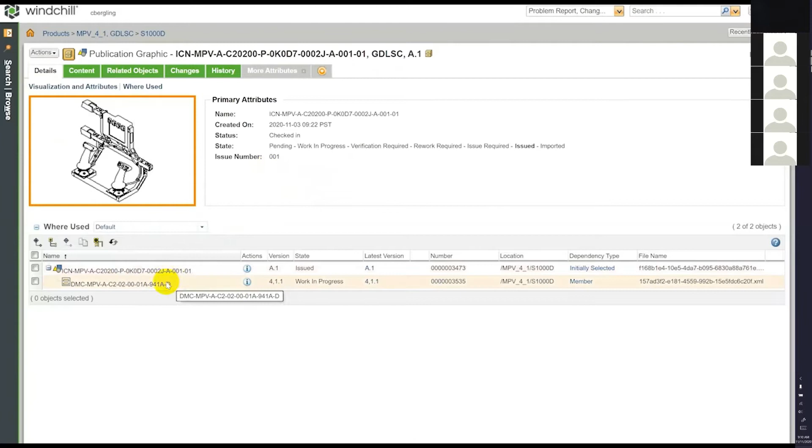This particular data module is only using one graphic. So if I go to the information page for that graphic, you see it looks very much the same, even though this is a graphic file and it's not a piece of XML. I still have the same information page. You can see here I have an inverse relationship to what I had on the XML page, in that I can see where this is used.

So this is the graphic itself, and I can see it's used in this particular data module. If this graphic was used in multiple data modules, it would list those data modules all here in this where used table. It also conveniently gives me a line art graphic or a thumbnail representation of what this graphic is, so I can see just as a quick view what this graphic is.

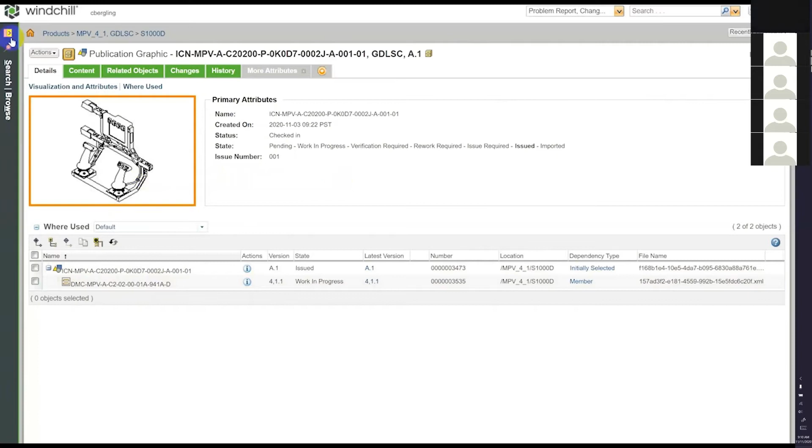So if I want to make changes to this graphic, this needs to be assigned to me. It needs to go through the S1000D workflow, which is prescriptive from the specification. I also need to be assigned to this particular data module code as the author. Only the author is able to make changes to this data module.

And the same for the rest of the team. And I'll just take a quick glance at the team I have configured for this particular product. So on this particular product, the same user that I'm signed in as, which happens to be Christina, is assigned to every role. But you can see here the different roles that are must-have per the out-of-the-box workflows for S1000D for Windchill. And you can see the author, who's able to make changes.

For those who are dealing with the illustrations, it would be the illustrator role. And then there's a product manager, a publications manager, and the reviewers are the ones who review the content that's coming from the authors and the illustrators. Reviewers are able to review content and even in some cases able to make suggested changes that would go back to the author to be finalized. It would cycle through that process until the changes to the data module were fully verified, in which case they would pass to the issued state for that data module code.

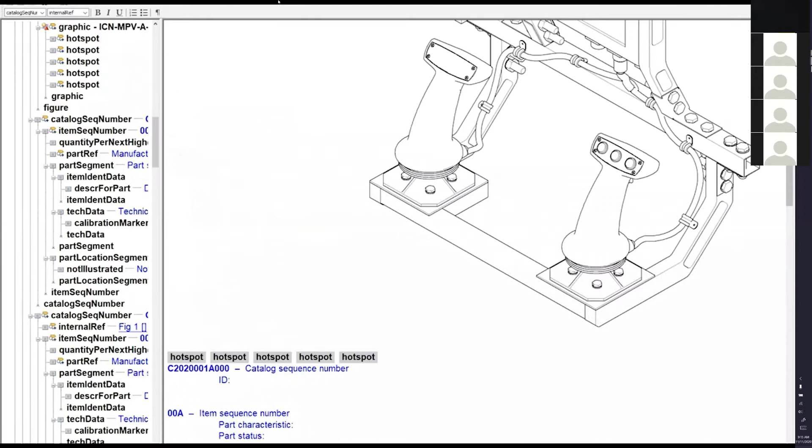You can see here that same styling is applied to this data module too. So it's consistent across the entire specification as far as the experience that the author has, and it doesn't differ depending on that data module. Now, it certainly can, it's something that Arbortext can support, but for simplicity's sake, for S1000D and most implementations, we want to have the same experience for every author throughout the XML specification.

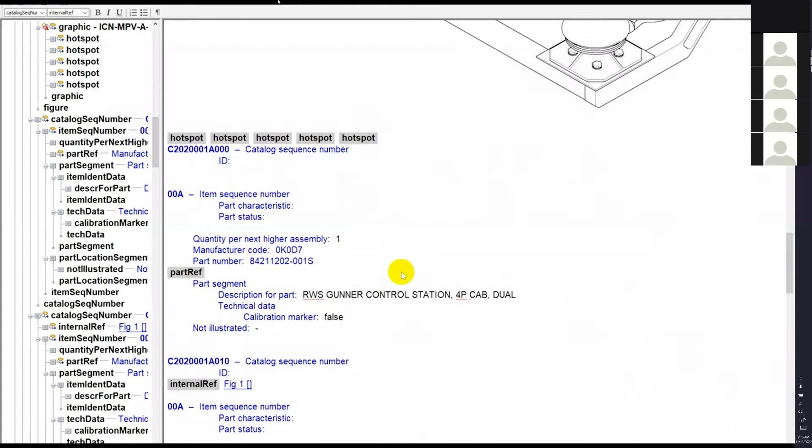You can also see here the graphic that I had pulled in that I had shown inside of Windchill is also displayed here. So I can see this graphic, I can have a visual representation of what this is. I can confirm that I have the right graphic pulled in. You can also see here that there are several hotspots that are defined on this graphic. Those become important as we look at this inside of the IETM, but just wanting to point out here that they are defined within the XML. Then when this gets exported out for publishing into the IETM, it carries that data over.

So within the authoring experience, again, it doesn't allow me to go outside the specification, but S1000D also applies something called business rules, and the business rules are enforced by something called a BREX file. And as the author, I'm able to go into the S1000D menu, and I have several options in here. I can create an ICN, I can validate my entities, or I can do a BREX validate.

So if I just hit BREX validate on this, it'll run a check, and it'll tell me that my document in this case is valid. If I had done something that was outside the business rules, say I used the wrong type of a word, if I had a non-standard header, or if I was using the wrong brand name, there's all kinds of things that this could be. It would flag those things here.

So it's a bit of a check that's outside of just normal XML validation. It really is more about the data and making sure the data follows the business rules of the organization that is authoring this XML content. I'm going to go ahead and close this out. I'm going to go back into Windchill.

So in addition to the authoring and publishing process, we can also create publications and deliver content per the S1000D specification. So in S1000D, publications are referred to as publication modules. And in Windchill, these are called publication structures. And these allow you to build your publications right from within the content management system. This is helpful because you don't need to go to a separate system or even into Arbortext to search and pull data into a publication. Then you're also able to publish from the publication structure.

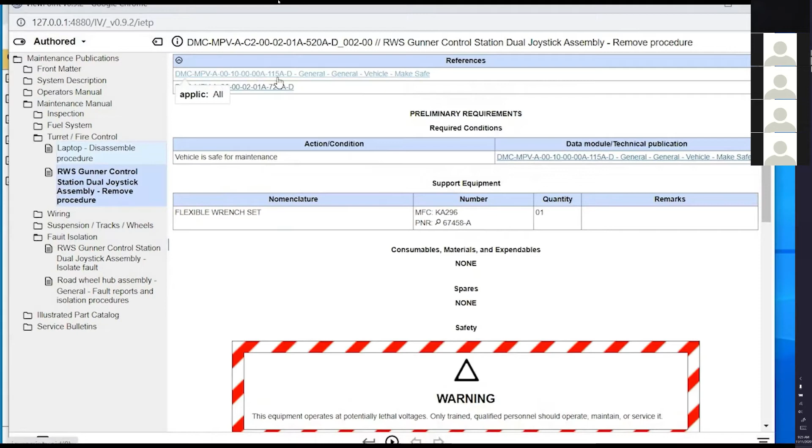So looking at a procedural module in Viewpoint, your references at the top are going to be links to other data modules. You can go ahead and click that. It'll launch me to the other data module so I can see the content.

As I scroll down, every time you see a part number in Viewpoint, it has this little search. So if I click the search, it's going to automatically perform a part number search on that part number and give me all of the instances where this part number appears in the publication. In this case, it only appears in this one data module, but if it appeared in multiple locations, I would have multiple results.

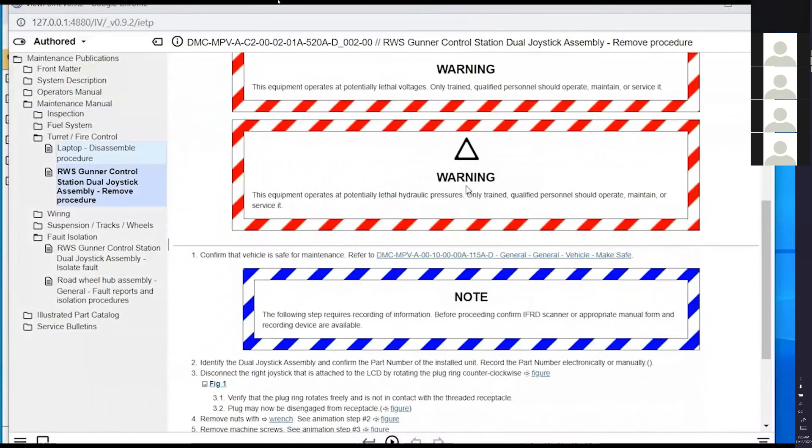Scroll down, we have warnings, cautions. If I found a tool in my procedure, I can hover over it to get a tooltip with some part information, but if I go ahead and click the link, it'll jump me up to the table where the tool appears. And then if I have a figure in my data module, I can open the media pane.

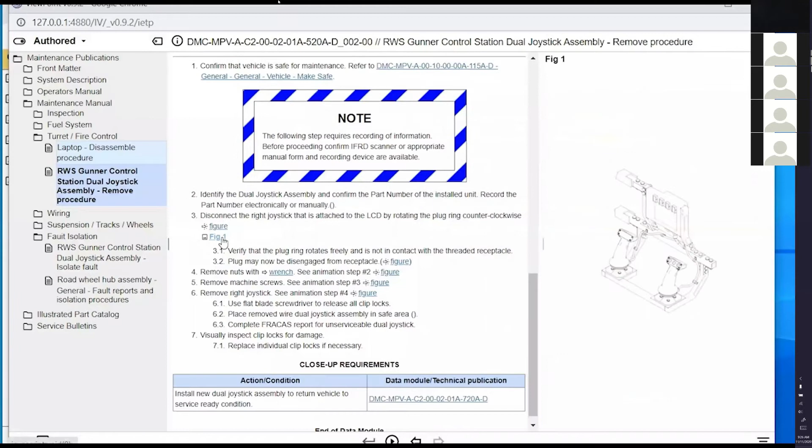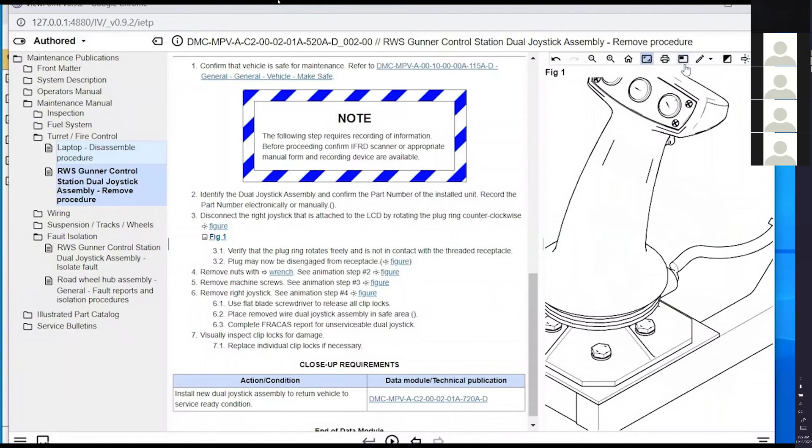The media pane offers some basic tools for manipulation. I can zoom. I can toggle the background. If there were hotspots, I could enable those. We can get into those a little bit more with the IPDs. If I wanted to really zoom, maybe get some perspective on where I was in the context of the image.

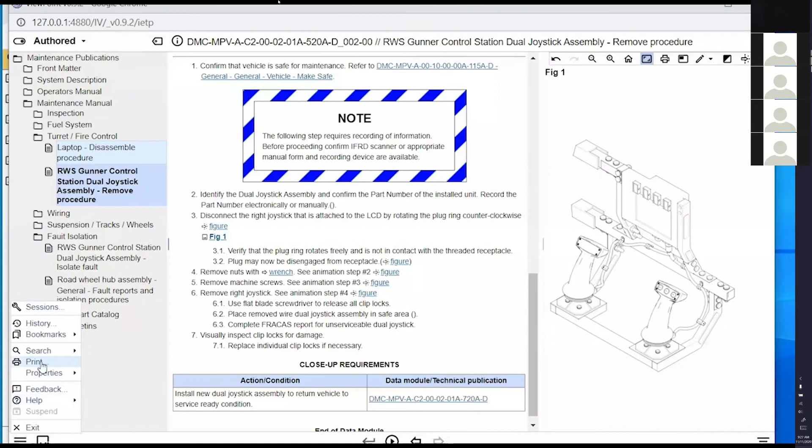Now, if I wanted to then print this data module, there is a print option. Now, this print is leveraging the browser print engine. So this is not running against an S1000D style sheet. Instead, it's just taking what you see on the screen and running it against your browser print engine. So if you had like a device connected to your computer, that would appear as an option here.

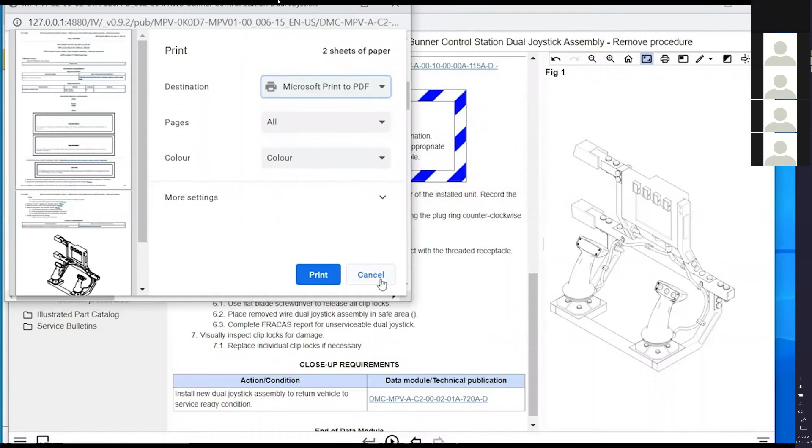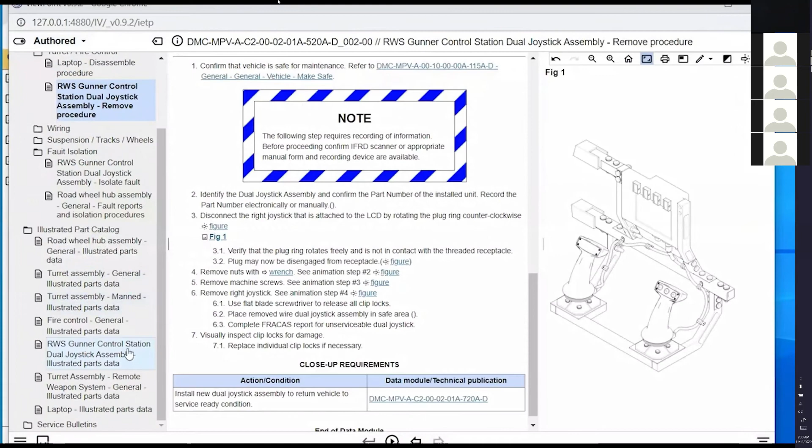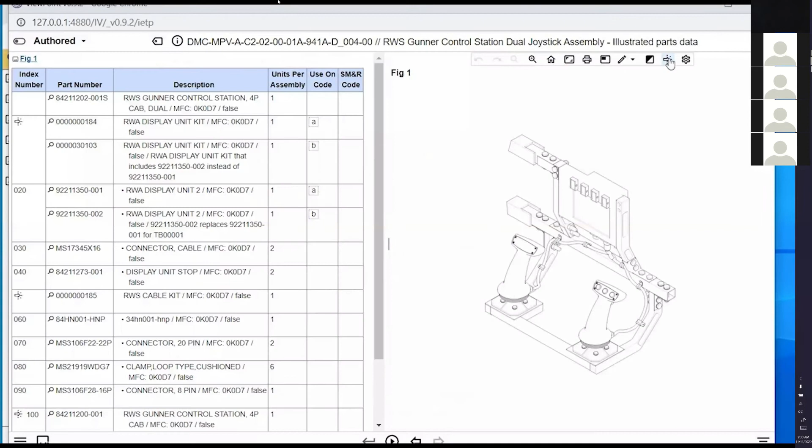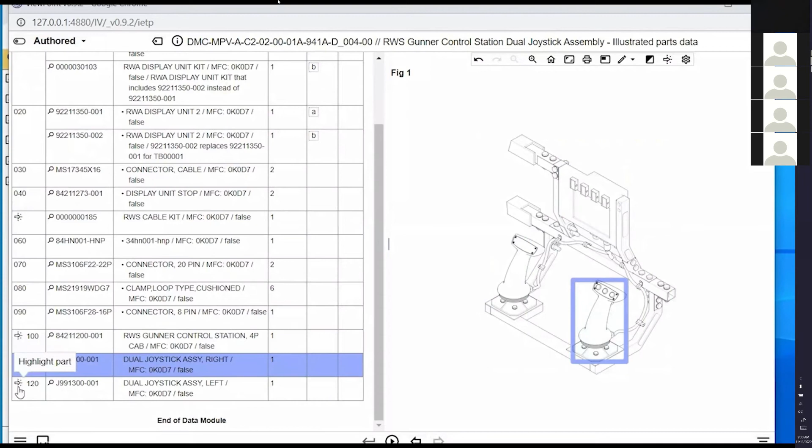When we're looking at the IPD, we can see that this one has hotspots enabled. So as we click through the hotspots on the graphic, they're also highlighted in the table. That can be done also from the table side. Then all of the same tools that we saw in the media pane in the data module are also available here. Additionally, we have these annotation tools.

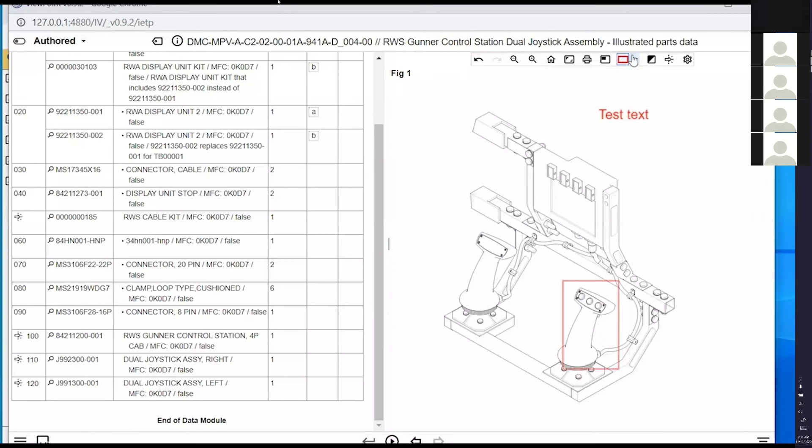If we wanted to add text, or if we wanted to draw, these could then be hidden or shown or removed. And then if you had annotations on the graphic, you would be able to then print it with those annotations on it.

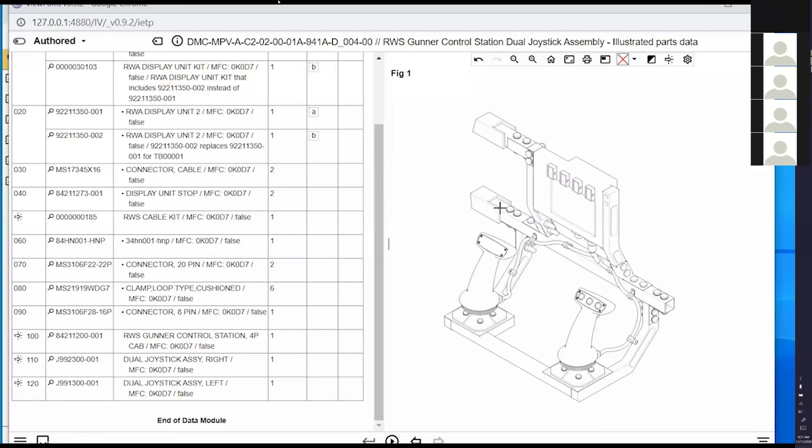So as you can see, this is the same graphic we had earlier in Windchill, which has now made it all the way out to our viewer, and it can be consumed by people in the field. So this has been our S1000D data in Windchill all the way out to the viewer, and a basic tour through Viewpoint.

Okay, let's jump back into the PowerPoint for a second, and then we'll take some questions. Just to summarize everything that we showed there. So that was really just a touch on a few different features as far as S1000D and Windchill, and then how that same content would be viewed inside of an IETM, in this case in Viewpoint. So you probably saw some of the geometry and some of the graphics that we showed, and they were the same graphics between Windchill and Viewpoint. And that was on purpose, just to show that those things do carry over.

Now, what we didn't show, just for sake of time, is that geometry can be derived from upstream engineering content, and it can come from CAD files and things. And that can be rendered into illustrations meant for the service side, meant for technical publications. So that's really the benefit you get of doing this inside of Windchill, which is also a PLM system, in that you can either handle your engineering content within Windchill, or that engineering content can be pulled into Windchill and then can be leveraged downstream for your technical publications, and that can be delivered out to an IETM, to a PDF, or some other output.